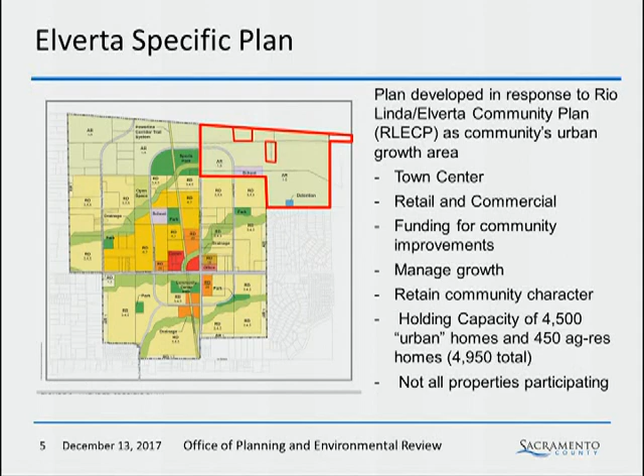It looks like a pink box there in the middle. What is that? It looks like the number 11 on it.

Hang on, let me get this. This right here is Northborough 2. It's under the same ownership, coming forward separately, and it's already within the specific plan urban area—though I'm not sure it's entirely the same ownership; it's called Northborough 2, so there may be some ownership similarities. Could I ask a follow-on question while I get that exhibit up? There are a couple of in-holdings, and maybe those property owners are thinking something similar to what's being proposed here.

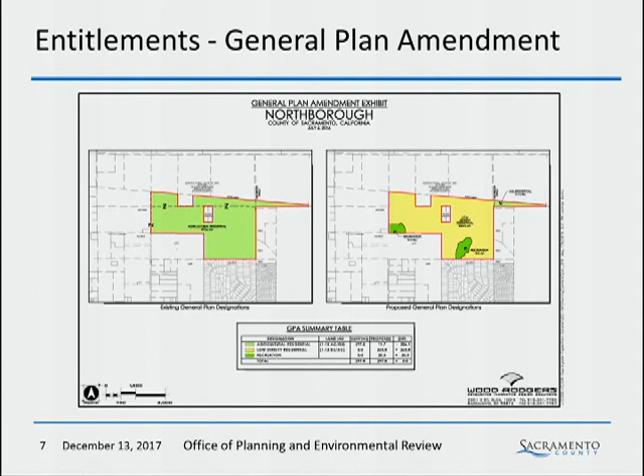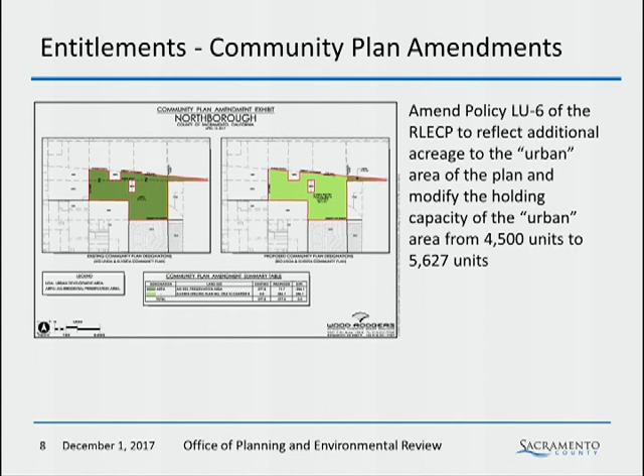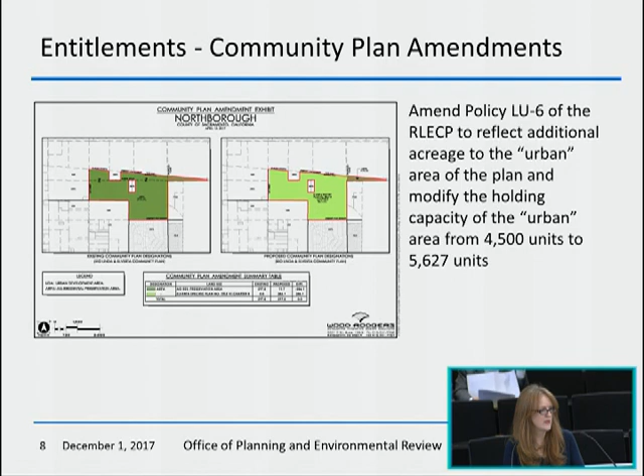The entitlement you would be acting upon today is the general plan amendment, moving the area from ag res into urban and recreation. There is a community plan amendment making a similar change, but most importantly also amending policy LU6, which has to do with the cap on the number of units, to reflect the additional urban acreage and modify the capacity of the urban area from 4,500 units to 5,627 units to accommodate this plan.

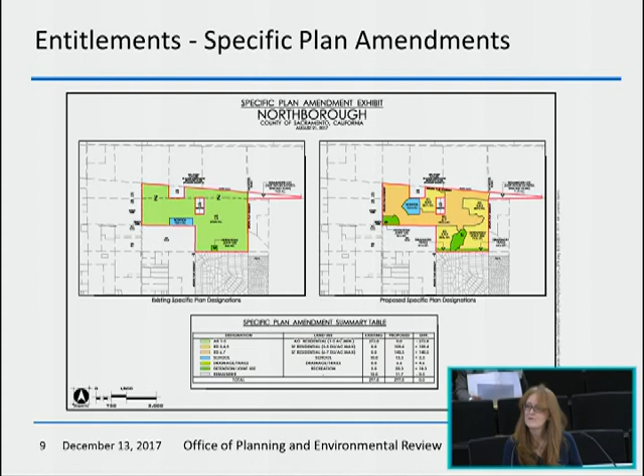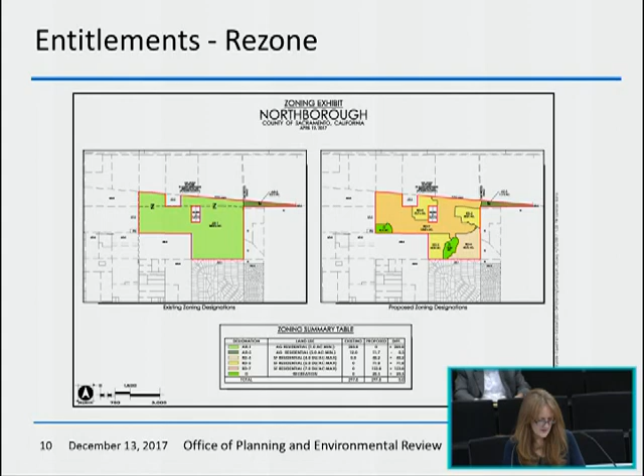There would be a specific plan amendment to recognize the variety of land uses and the various residential densities, the school site, and the drainage areas, and a rezone that looks very similar to the specific plan amendment, with the 3 different residential density types and the drainage areas as open space.

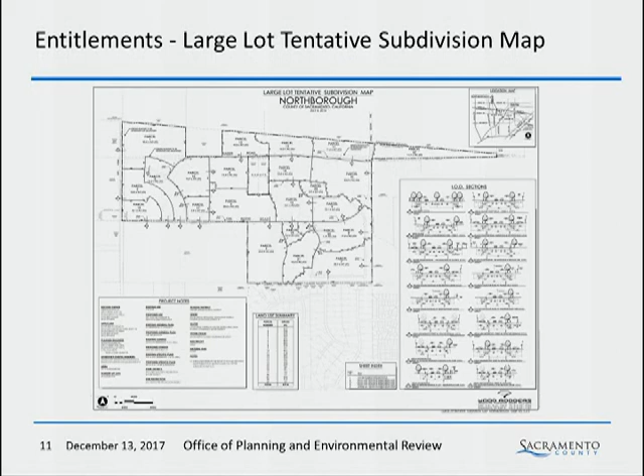There's also a large lot tentative subdivision map so that they can work on the project in chunks with these various phases and large lots, and then the subdivision map for all the lots here. So in general, there are larger lots down in the bottom right-hand.

Oops, I did something there. I hit the wrong button. Oh, there we go. Sorry. Uh-oh. What I did. Want to show a movie while we're waiting? I hit a button. Try it one more time. Okay, it worked now. Let me flip back. I'll be careful what I do. I think it was operator error up here. Pretty sure that was me.

Okay, so there are some larger lots down in this corner, a variety of standard lots. I did want to point out right along the loop road, there are some smaller townhome lots that are alley product. We did want to make sure that homes fronted on that loop road so that there were eyes on the street, particularly if kids are using the loop road to circulate around and families to get to the school. We didn't want a sound wall on that loop road, so there are some smaller lots there.

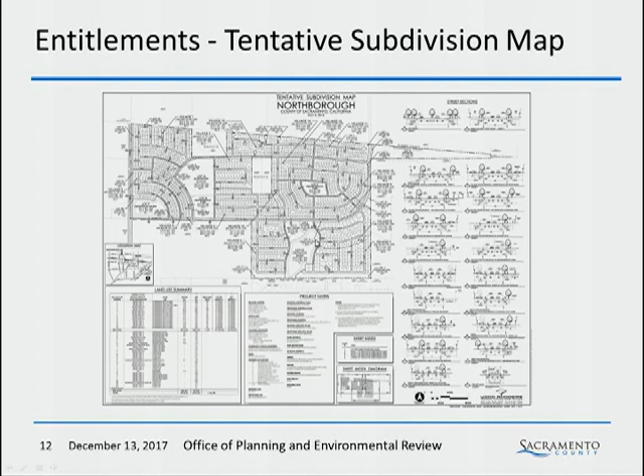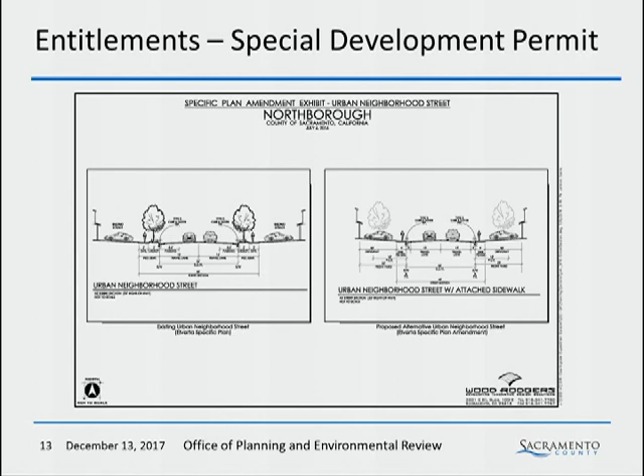There is a special development permit to allow some of the urban neighborhood streets to have an attached sidewalk, which planning did conclude would be acceptable on some of these smaller, less trafficked streets. The specific plan calls for everything to have separated sidewalks, and we did agree with the applicant that some of the smaller, less trafficked streets, that would be an acceptable thing to do.

So overall, the project components include 1,127 new homes with a range of housing types and densities everywhere from RD4 up to RD7. Again, those townhome lots that I pointed out along the Loop Road, and the larger lots that have a minimum of 9,375 square feet down in this pale yellow area.

There is no separate commercial in this part of the project. We would be relying upon the commercial in the town center, so this would be more residents to support that future commercial down at Elverta and 16th.

There are 3 parks, a 1.5 acre park, a 3.3 acre park, and a 5.5 acre park shown in green. An elementary school site of 12.5 acres with capacity for 800 students. A future recreation center, shown in red here by the drainage area.

The 2 detention basins are shown in blue here and here. This is the school site. Slightly darker blue are the detention basins. A trail system, including down here with access to Gibson Ranch - this would be an equestrian trail, and this would be more pedestrian trails along this road.

There's a new groundwater well, which is very important to the Rio Linda Elverta Community Water District. The water well will be located up here, and the water district is very anxious to get this well site up as it has better quality water than some of their other wells, and that's needed for the community. There's also a 3 million gallon water storage tank there.

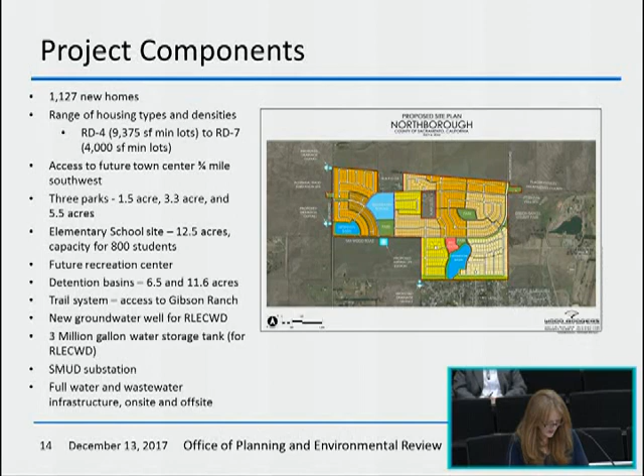There will be on-site road improvements to Kasser, Tanwood, Loop Road, with 3 roundabouts on Tanwood Road, and improvements to 16th. Elverta will be built out at 4 lanes, 16th at 4 lanes. Some conditions there, some intersection improvements at 16th and Elverta, and depending on whether it's done as part of a county project or by this applicant, some additional improvements off-site at 28th Street and Elverta Road where there's existing traffic problems.

Leanne, just pause for a second. Sue Frost. Sure.

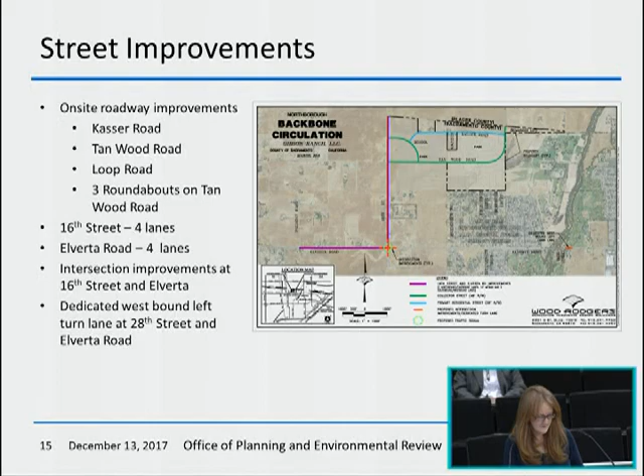Leanne, the improvements to Elverta, does that include the Dry Creek Bridge widening? I'll have to look to staff to see how much is conditioned on this project versus part of a county road project, since multiple things are going on. I think the Dry Creek Bridge widening was scheduled for 2021, and my question relates to timing, since that's one of the big concerns in the community. Are the roads going to have capacity for the rooftops that are coming? I get texts from people telling me how bad it is out there at 7 and 8 in the morning during traffic times. So I'm curious about timing, and will it include the bridge widening?

Right now, the structure of the condition for that segment of Elverta Road does not include that segment further to the east. But we've been working with our Department of Transportation to restructure some of the overall Elverta Specific Plan rezone conditions relating to transportation infrastructure, because we've heard similar concerns as we've gone out to the CPAC. The idea is to have logical segments such that there's minimal disruption to existing residents and it addresses their traffic needs or constraints in the best way possible. So we'll be working with transportation, hopefully aligning individual project responsibilities with county projects to accomplish that goal.

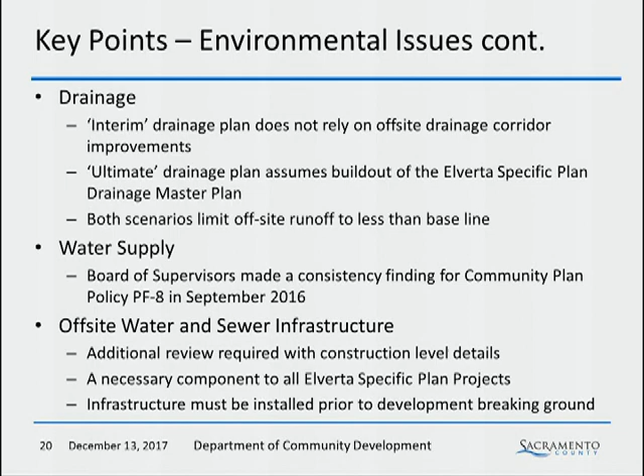Okay, Supervisor Frost. I want to thank you for the wonderful reading during my morning and night hours.

And somewhere in there, I saw something about the overflight zone. Is this within the path of air flight? Is that what that means? It had originally been in the McClellan overflight, which plan has not actually formally been entirely updated, but the noise contours are reduced from operations. So I'm looking to staff, but I believe the issue is...

We are requiring navigation easements on some of the properties because of the proximity to McClellan. I don't know if there's a homeowners association or CC&Rs. How do homeowners who are buying in receive notifications so later on they're not coming back saying, well, I didn't know a plane was going to start flying over my home?

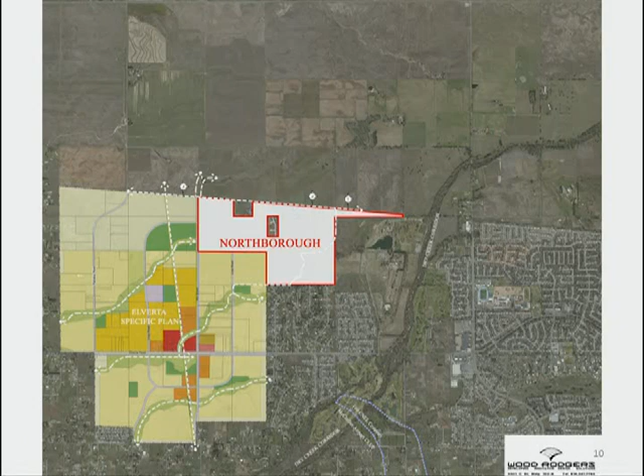So as Leanne mentioned, this is the project within the Elverta Specific Plan. Obviously this project, the Elverta Specific Plan project was many decades in the making. The discussions going back as far as the 1980s, a little bit of history. That's me in the 1980s. So a lot has changed since then.

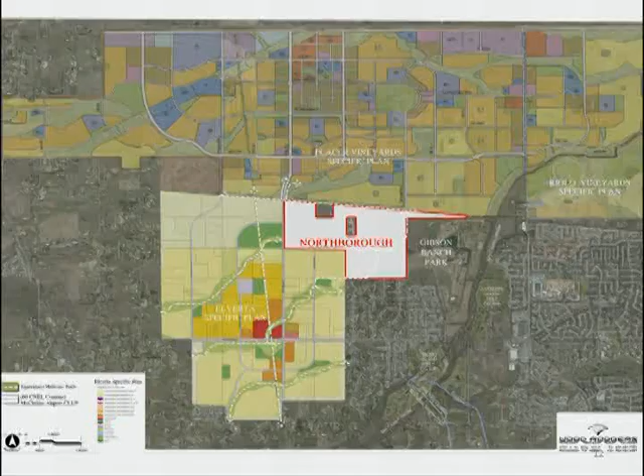Subsequent to the approval - forgot to share your Christmas pictures. You want some? Maybe I'll bring some next year. I think that's my former chief of staff too. Right? It is, it is. Those were good days, I'll tell you.

In any event, the Placer Vineyard project, as you heard, is approximately 5,000 units, 5,000 acres, 14,000 units immediately north. Obviously that changed things, was a game changer. When originally conceived, the Elverta Specific Plan intended to feather densities into large agricultural spaces into Placer County. But obviously with Placer Vineyards getting approved, what it in essence created is really a donut hole of development there. So we really took that as an opportunity to rethink some of the aspects of the Elverta Specific Plan, and an opportunity to engage the community given the new planning realities of the area.

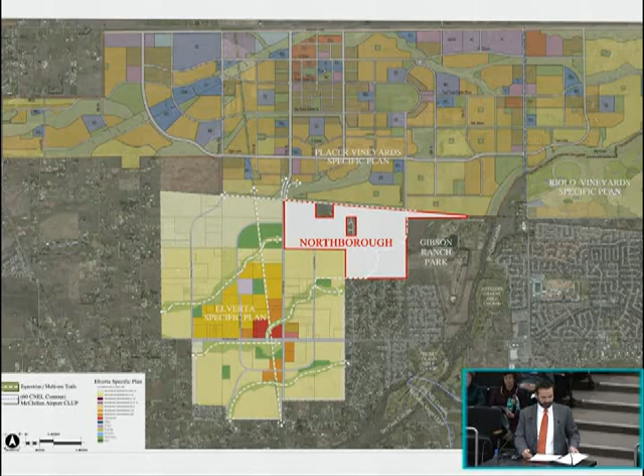So we engaged in a significant amount of community outreach, many years and many hours, countless meetings, several CPAC presentations, obviously unanimous positive recommendation from the CPAC. We had 3 large neighborhood meetings at Cherry Island. We made presentations to the Park District and other agencies, and really hundreds of stakeholders over time. And what that resulted in was the project that you have here.

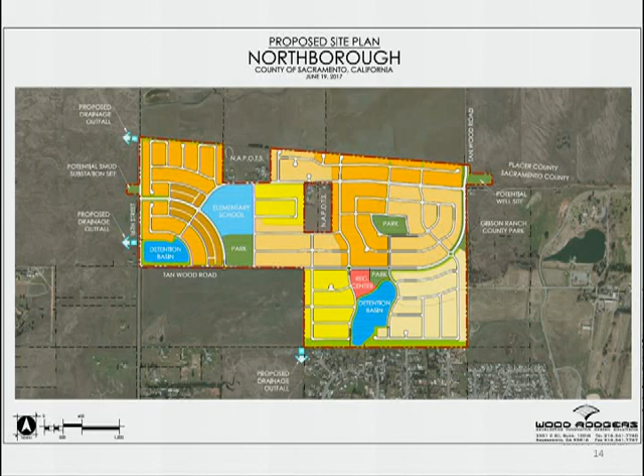I pulled the parcel lines off so you can kind of get a sense. Obviously we have varying housing types, as Leanne mentioned, from alley loaded to executive style homes, and next to the detention basin here. Oh, where's that mouse? This detention basin here. The rec center is here, as you see.

The elementary school, the rec center, Gibson Ranch, and then what's not depicted on this map here is a 30-acre regional sports park that we currently own and will be dedicating to the Rio Linda Parks and Rec District as part of this project. These really form sort of the nodes of community and the aspects of the project that really drove its design.

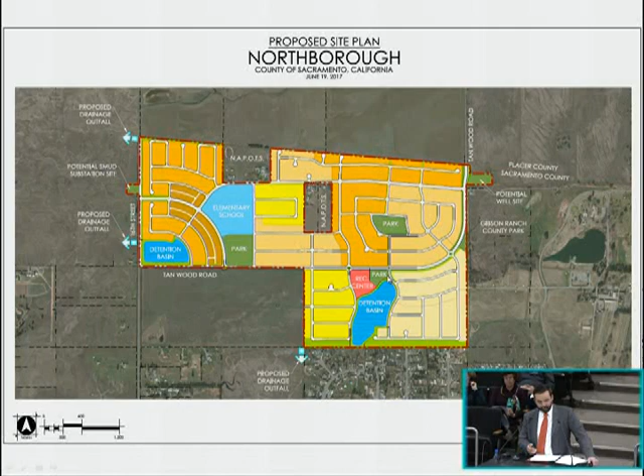This next slide shows you, I won't go through all of these, but really shows all the changes we made to the plan over the years with all that input that we gathered.

Some of the aspects, as Leanne mentioned, we increased the school size and enlarged the detention basin here. There is a berm on Gibson Ranch that has some potential in the future, depending on weather conditions and the amount of water, to present a flood risk. So we designed Tanwood Road to facilitate that water flow and enlarge the basin to accommodate that.

Along the southern portion of our property, we heard loud and clear from the folks that live in this community here, on 1 acre lots, that they did not want traffic connectivity through their community, understandably so, with roughly 14,000 units going in Placer County, and traffic being like water going through the path of least resistance. There was fear of significant traffic impacts through their community.

So we put this 100-foot buffer here, including a landscape trail. We'll include an equestrian and pedestrian path, and folks were very pleased with that.

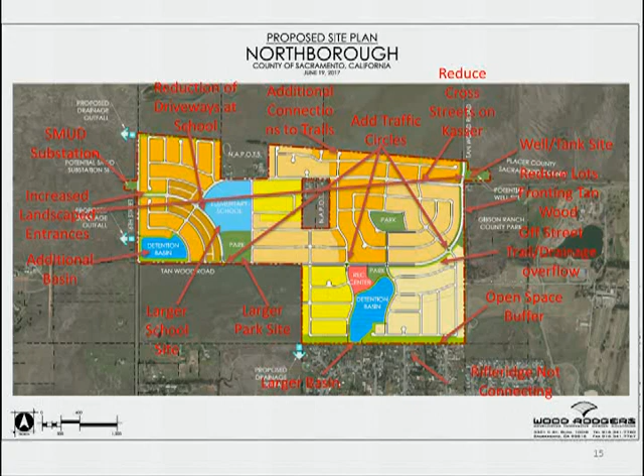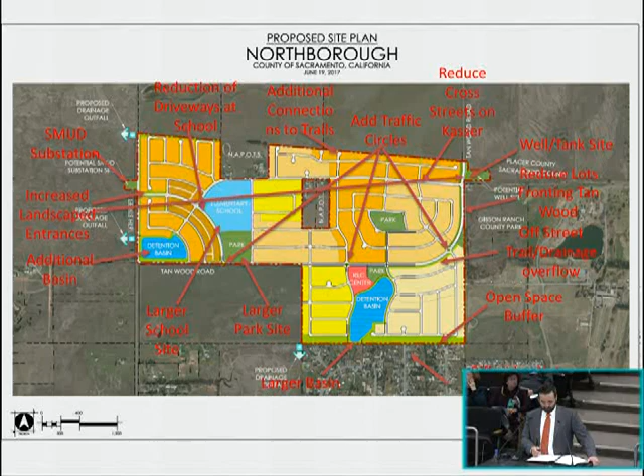Obviously, also we are donating and reserving a site for the Rio Linda Elverta Water Company here. This isn't required of our project, but as you well know, there's an issue with water quality and system-wide resiliency out in the Rio Linda area due to the chromium-6 plume from McClellan. This site would be outside of that plume and therefore provide a safe source of drinking water for existing residents in the water company. This exhibit shows the pedestrian equestrian connectivity.

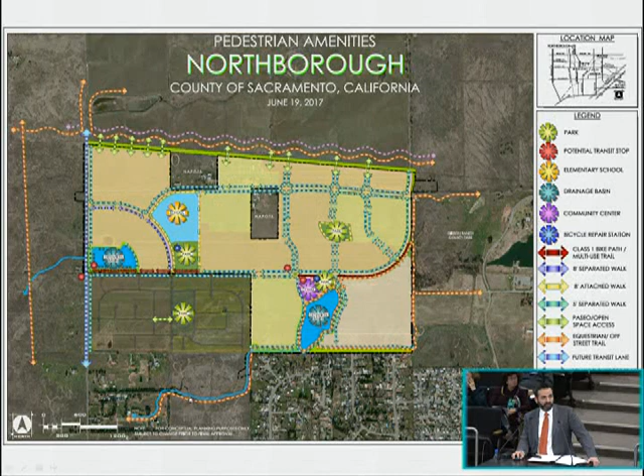Here, as you will see, we currently have this equestrian path. As I mentioned, it also goes along and around the detention basin and along Tanwood, and provides connectivity to Gibson Ranch. There's also a significant amount of pedestrian connectivity throughout the plan.

The significant amount of trail connectivity and the sports park, as we discussed. I talked about the flood protection aspects and the water supply reliability and system-wide resiliency.

The other big thing we heard when we engaged community members was a strong desire to have shopping opportunities, particularly a grocery store out in that area. There is a dearth of those types of amenities. As we know, that market has changed significantly with Amazon, and the retail sector is undergoing a massive amount of changes. Where at one time you maybe needed 4,000 or 5,000 rooftops to support a grocery store, you're now close to 8,000. So we believe that the increase in density in this project for the Elverta specific plan, combined with some of the units in Placer Vineyards, because you usually look at an area within a mile of a retail center, really are going to provide that critical mass that could facilitate development of the commercial core in the Elverta specific plan at 16th and Elverta.

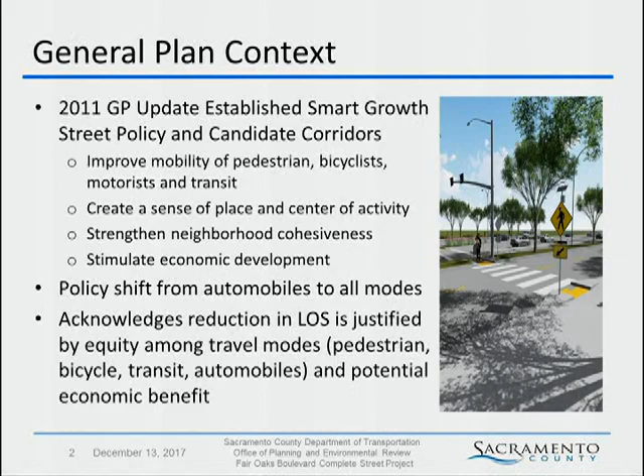This is one of our first complete street projects to come forward. We have a whole team here to help work this through: Mike Penrose of Public Works, Ron Vicari, the Director of Transportation, Matt Darrow, who's going to give the bulk of the presentation, and Adrian Engel with Fehr & Peers, who also worked hard on the project.

With those introductory remarks, I will get out of the way and allow Matt Darrow with Transportation to give the presentation. First time in 2017, I think you've been before us. Yeah, that's right, you've been staying pretty shy. Let's see if I can figure out how to work this. You're usually sitting over to the right, but now you're up front and center. Yeah, I get to sit down and talk, but now I get to stand up today.

Welcome. Thanks. As Leanne said, I'm Matt Darrow, the project manager for this master plan. I'm going to take about 5 minutes of your time and go through about 10 slides here and summarize what we've been doing for the last 3 years.

Our task was to develop a multimodal streetscape master plan for the Fair Oaks Boulevard segment between Howe and Monroe, as well as Fulton Avenue between Fair Oaks and Sierra. Funding for this project was provided by a 2014 SACOG Bike and Ped grant that also included construction dollars for 2 signalized pedestrian crossings on Fair Oaks, which we call phase 1 of the project.

As I hit the button here, I'm trying to overlay where the city falls in relationship to the county. You can see that this corridor is right up against the city, and we've coordinated what we've done so far with the city.

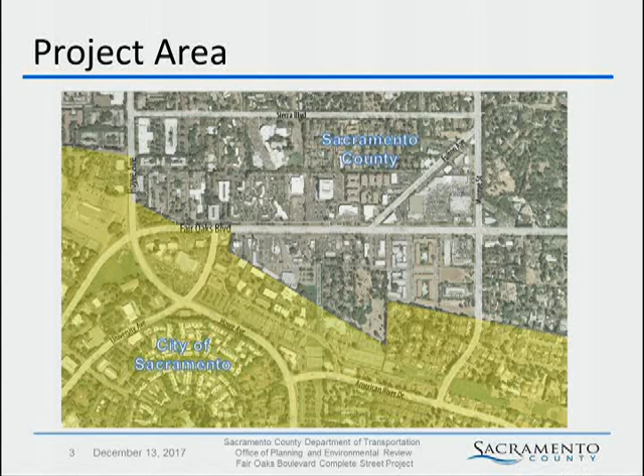We kicked off this whole process in 2014 by going to the Arden Arcade CPAC, and over the next 3 years we held a number of very well-attended public workshops, had a walk audit of the project area, met with a number of business interests, took the project to the SACPAC, went back to the CPAC and Planning Commission, and received positive recommendations to get us where we are here today at the board. Not only did the feedback help us define the preferred alternative for the master plan, but it also showed us significant support in the community for making changes along the corridor.

Now I wanted to take a quick look at the highlights included in the preferred alternative. There will be 4 new pedestrian crossings on Fair Oaks Boulevard in the form of 2 new signalized intersections. The one all the way to the left is Fair Oaks and Howe, which exists today. Moving left to right, Fair Oaks and University is a newly signalized location we're proposing. Then you have the next signal at Fulton and Fair Oaks. All the way to the right is the existing signal at Monroe and Fair Oaks. We'll also have 2 new signalized pedestrian crossings.

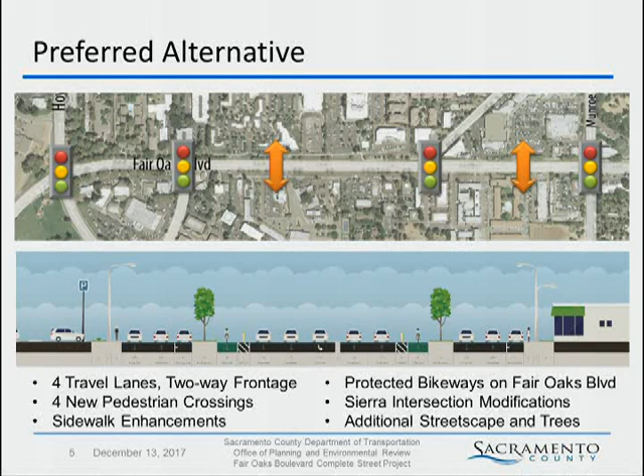Shown here are the 2 orange arrows: one near Pavilions, and one near Loehmann's Plaza. We'll be narrowing this stretch of Fair Oaks Boulevard to 4 lanes, consistent with the number of lanes to the east and west of this location, and we'll use that right-of-way to provide protected bikeways along the corridor. We'll keep the 2-way frontage roads because they allow us to keep driveways consolidated and off of Fair Oaks Boulevard, and we'll close some currently allowed turning movement openings in the median and frontage road, where we'll put additional streetscape and trees.

None of the other preferred alternative improvements I mentioned in the previous slide will occur with Phase 1 of the project. If we do get approval of this Phase 1, we anticipate being able to construct this portion of the project in 2018.

In case someone is watching, let me explain what a pedestrian signal is. It's a push button. If you're a pedestrian, instead of walking all the way to the east end at Monroe or the west end at Howe, we're seeing people run across the road. So we're going to provide two ped crossings. Someone would come up, push a button, a signal head would stop traffic. Those signal heads would be coordinated with the other signal heads along the corridor. The person would get across, and traffic would resume.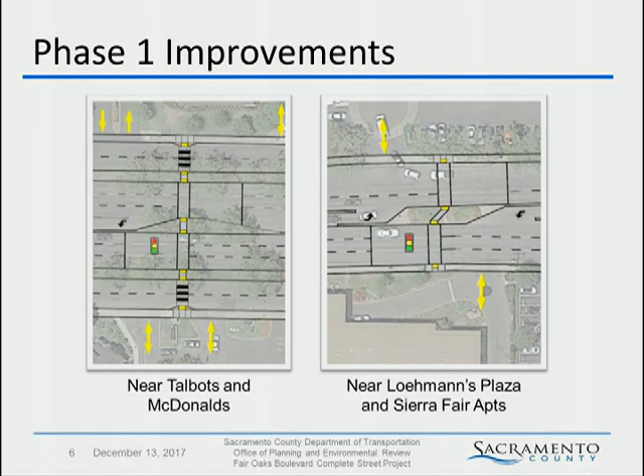Jumping back to the master plan, I wanted to show some conceptual details of the two new signalized intersections at University and Fulton. The left picture depicts Fair Oaks and University as a proposed signalized intersection, and on the right, Fair Oaks, Fulton, and Fairgate would all intersect at that location. Full access turning movements would be allowed at both locations, and the southbound sweeping free right we have now at Fulton and Fair Oaks would be squared up and intersect at Fair Oaks across from Fairgate. Keep in mind these aren't final designs yet, just a master plan level document, but this is basically what we're going to try to deliver. You can also see the physical separation of the on-street bike lanes and the green pavement treatments we're proposing for the separated bike lanes.

May I pause for a second? Sure, we have Supervisor Serna.

Thank you. It's hard to tell from these exhibits, but is there still going to be the odd three-way stop at Pavilions, where it's marked 'don't enter this area'?

Exactly, so as I mentioned, we have funding for Phase 1, which are the two signalized ped crossings. That would go in without any change to that, but the master plan would remove a lot of that funky center intersection and hashed out pavement. We've all driven out there, it's confusing, and that's the whole point of this project, or one of the major points.

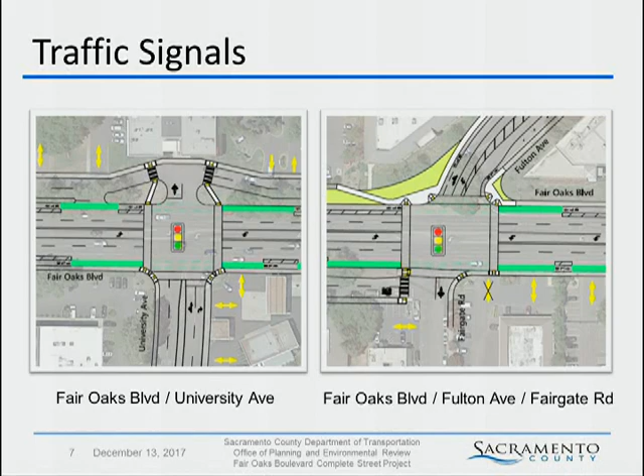We could sign that, yeah, absolutely. That, I mean, I hope it's better than that. Yeah, I mean, if that would be... When we design, we'll do a turning track movement to see if that type of vehicle could even make it.

It's going to be a problem with vehicle length for a number of reasons, not the least of which is that if they can't make the right-hand turn onto the frontage road, depending on the length of the vehicle, they might have their rear end still sticking out on Fair Oaks Boulevard. That's what I'm saying, and sometimes people back up. I don't know what you're going to do there, but we're going to be scrutinizing that.

Okay, so noted. Yeah, absolutely. Okay, let's see, I think I got through what I wanted to say anyhow.

Because we are going to signalize Fair Oaks and Fulton, we need to make modifications up at Munroe and Sierra. Currently, traffic heading northbound that wants to head northbound on Fulton has to come up to this intersection, make a right, head south on Munroe, then make a U-turn to head north on Fulton. We can't have that anymore once we make the modifications at Fulton and Fair Oaks, so we're going to modify this intersection conceptually like this.

We've made the commitment to returning to the Arden Arcade CPAC, because we had input when we went through there last time, to return during the design phase to talk about pedestrian crossing locations and intersection design and layout. So if you're on Sierra...

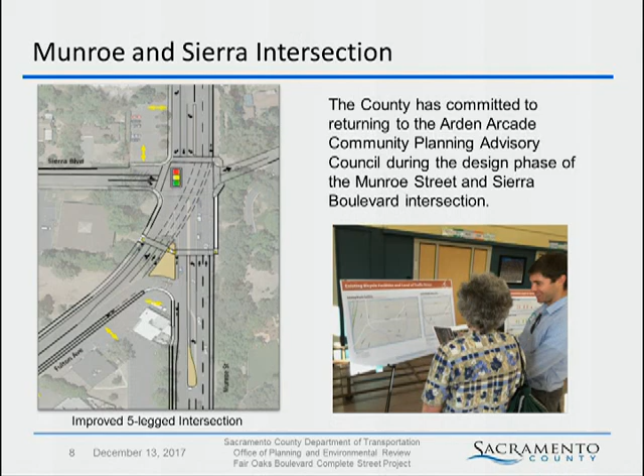Oh boy, I don't know. Yeah, that would be one of the things that we need to design and decide. Yeah, because that's a long and narrow intersection, right? Yep. Okay.

And then, let's see, so I mentioned that we're committed to going back through the CPAC during the design of this to work out all those issues and make sure we're not doing anything that the community doesn't enjoy. And we're just supposed to focus on the bike lane here, right?

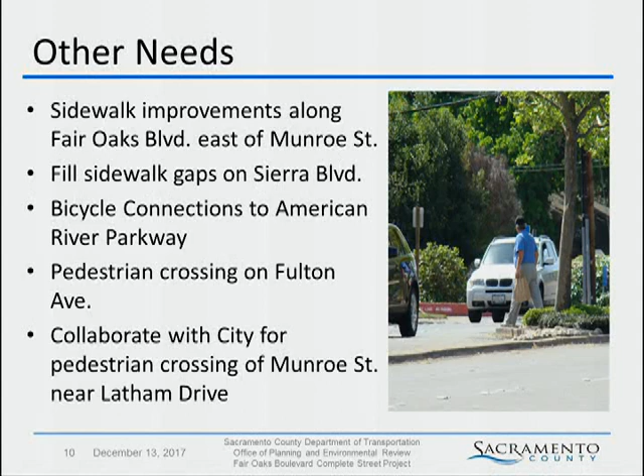Finally, I thought it was important to point out some items that, while they weren't part of our project, did come out of the outreach effort and came to our attention. Some of those were sidewalk improvements along Fair Oaks Boulevard east of Munroe, filling sidewalk gaps on Sierra Boulevard, bikeway connections to the American River Parkway, pedestrian crossing on Fulton Avenue, and continuing our collaboration with the city for pedestrian crossings of Munroe Street near Latham Drive. We plan to consider these items for future projects, future grant applications, and funding cycles.

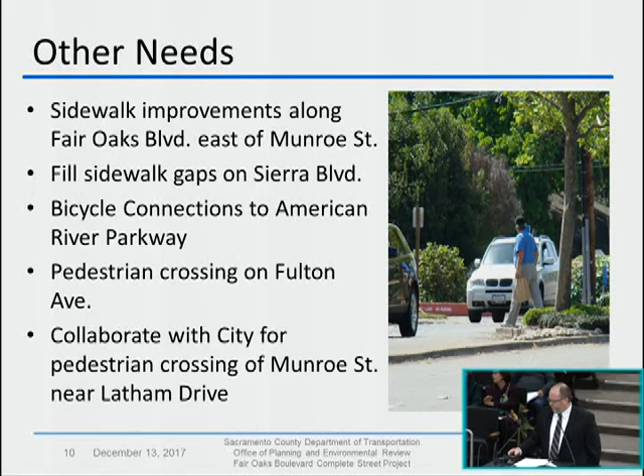Could you pause there for a second? Yep. So back to a couple things here - these are other needs. Are these included in the plan? These are not part of our project, but as we went through that three-year outreach process I mentioned, these are things that came out of the community input.

Okay, I think the sidewalk improvements on Fair Oaks Boulevard, East Munroe, are part of your plan. Mr. Vicari? Yeah, Ron Vicari, Director of Transportation. It is part of our plan, and what we're looking for as a future phase of the project. So when we do the phase near Munroe that would move westerly, we would include tying the sidewalks into the neighborhood, going from Munroe east into the neighborhood.

Yeah, I think we should discuss the sidewalks on Sierra too. A major portion of this project is to give the communities in the area the ability to walk to shopping. Sierra, between Howe and Fulton, where all the condominiums are, has about 60-70% sidewalks, and I think we ought to discuss getting that in there too, because it's pretty hairy - it's a busy street, as opposed to over in Sierra Oaks Vista. So this sidewalk gap on Sierra Boulevard, I'd like to discuss further with you as being part of the project.